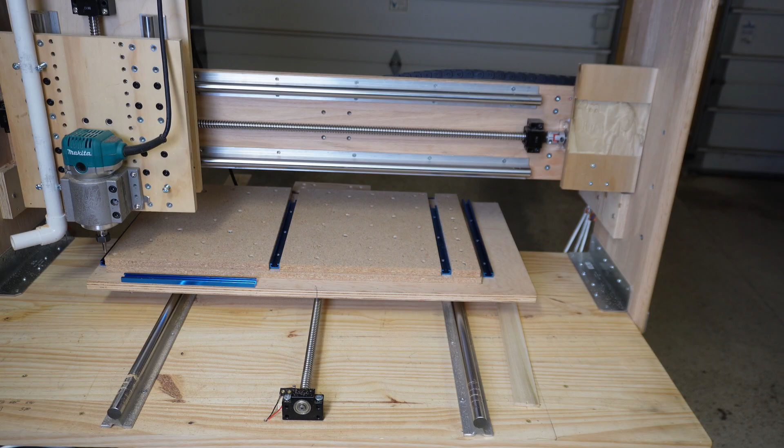I've zeroed my X, I've zeroed my Y, I've zeroed my Z. I'm going to flip on my router. I have my G code for my grid in. I'm going to hit start job.

I'm in VCarve Pro. You can do this on Desktop or Aspire or a host of other software. I'm going to choose to set up my job, and when I set up my job, I'm going to put in the dimensions of my grid that I want on my spoil board. In my case, I'm going to do 680 by 360. For the depth, you can put the depth of whatever your spoil board is.

Then we're going to go ahead and put our datum position. In my case, I'm going to put it on the bottom left-hand side. I definitely want to zero off the material surface, and I'm going to click OK.

Now that we've set up our job dimensions, go to the top right-hand side and turn on grid snapping. It looks like a little piece of graph paper. If it's not already clicked, click on it. When you do, you should see a series of dots appear across the screen.

If you hit F4 on your keyboard, it should bring up a menu. This is the snapping options, and in particular what we want to pay attention to is snap to grid. If it's not already there, click on it, and we're going to use this to set our spacing.

Let me illustrate by first putting in a spacing of 50 millimeters and hitting the enter button. When I do, it's shifted those dots so they're every 50 millimeters up and down all the way across our surface.

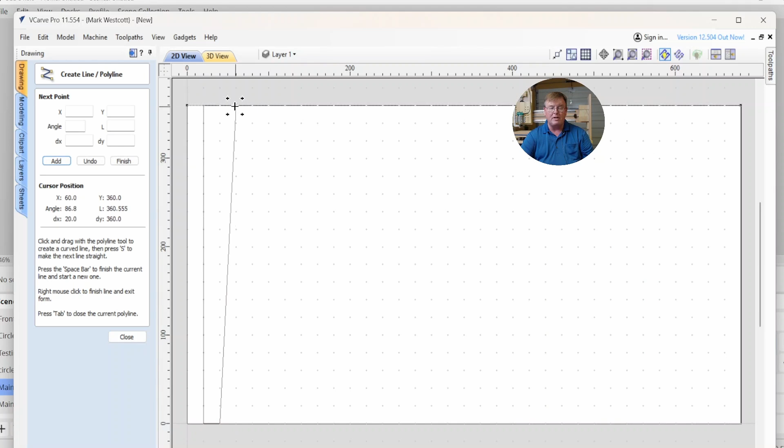Then it's just a matter of going to the left-hand side and clicking on the Polyline tool, and we're going to create a series of lines all the way across by left-clicking and working our way through points. If you hover over the points, you'll see the icon change, so you don't end up getting off.

If you do manage to mess it up, like I messed it up deliberately there, just go over to the left-hand side, click undo, and it'll back you up one point. You want to wind all the way through and do all your lines for your vertical. It doesn't take very long.

Now we're on the far right-hand corner, but our original was here. If we hit tab, it would put a line right across our board, which we definitely don't want. So what I'm going to do is hit the space bar, and that will terminate that polyline. We now have all our vertical lines evenly spaced across our grid.

I'm going to hit close, go back into the Polyline tool, and we're going to repeat that same process, only this time we're going to do horizontal.

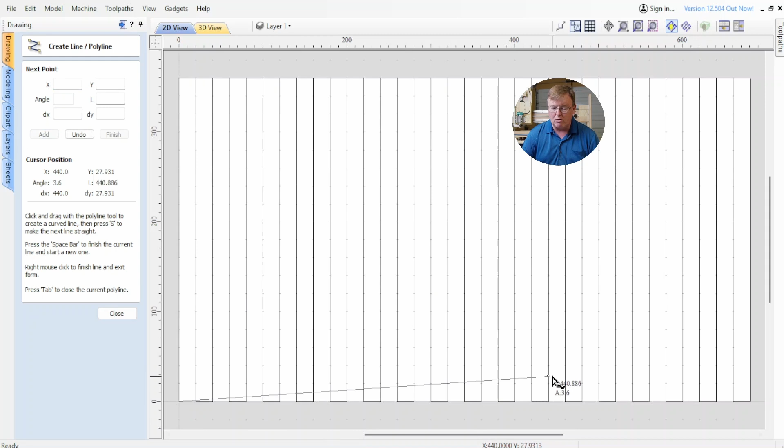So we're creating a new vector. I'm going to go far left, left click, and once again, even though you can't see those dots so well, they will light up. I'm going to wind my way through my spoil board again.

And obviously you could have put the spacing at whatever you wanted here. Oops, I've got to back up two spots - I didn't quite get that one.

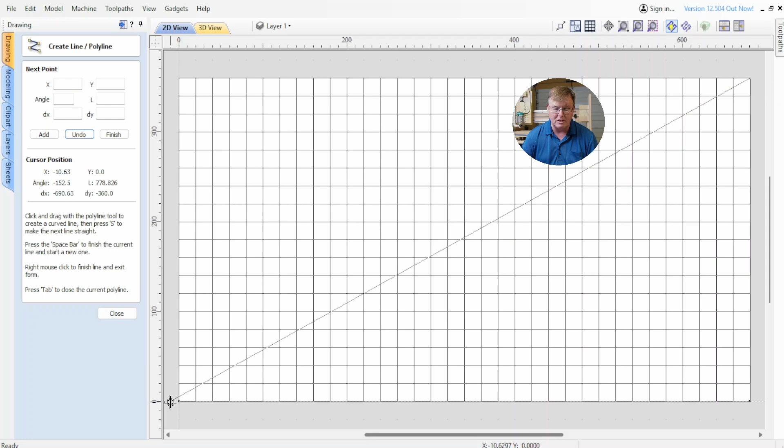I'm going to go ahead and make sure I get that top line too. Once again, I'm in that predicament where I don't really want to go back to my starting point and end the polyline, so I'll hit the space bar, and that will terminate the polyline in the middle.

We now have our grid. I'm going to close that out.

It's time to set up our tool paths. The tool path button is on the top right-hand side. I'm going to go ahead and click on the thumbtack here so that it doesn't slip off, and click on the vertical ones first, so I've selected all the vertical vectors.

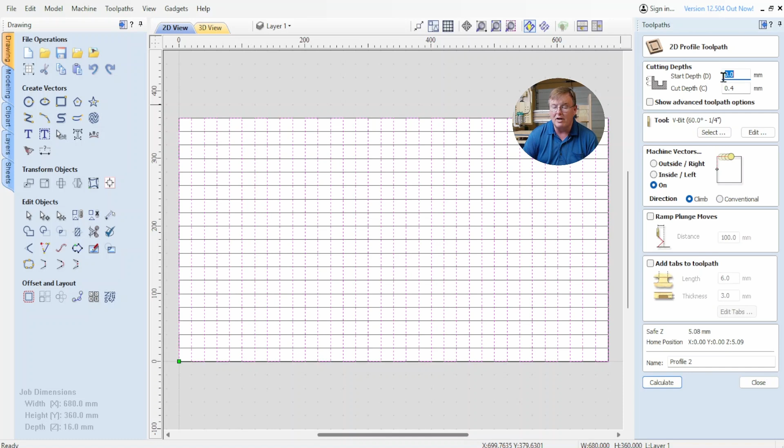I'm going to go to the profile toolpath and set one up. I'm going to start at a start depth of 0, and do a cut depth of just 0.4 millimeters. It's important that you've already surfaced your spoil board.

Then we're going to select our bit - I'm going to choose a V-bit, using a 60 degree one. If I want to change the speeds, you can ramp the speed up quite a bit because it's just barely scratching the surface, so feel free to adjust the speed with the edit button. That won't save it inside your tool database, but will allow you to run this very, very quickly.

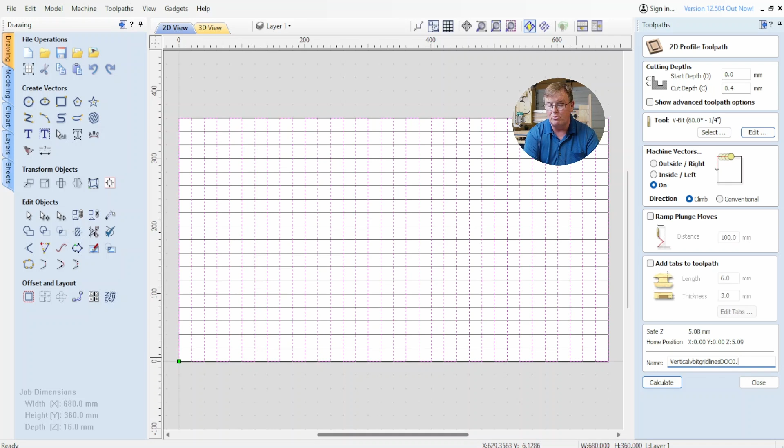Definitely want to do line on. I'm going to call this vertical V-bit grid lines, with a depth of cut of 0.4 millimeters. Calculate.

There's our vertical ones. I'm going to close that out. Let's go get our horizontal ones, going back to the 2D view. I'm going to select my other vector here, and turn this other one off so we don't confuse ourselves.

Everything should already be set up from our last one, so I have all my information. Same process, I'm just going to change the name of this to horizontal grid lines. Calculate.

So we have a separate one. Now I'm going to select both of those. I'm going to reset my preview, and I'm going to preview the visible toolpaths.

By doing it this way, it's going to run one vector all the way through, and then it will get the other one. That way you don't have your machine get confused and start doing little squares, which takes forever to machine. That's another reason why we didn't do it like an array copy of a single square. The machine time would be astronomically greater than it's going to be with this.

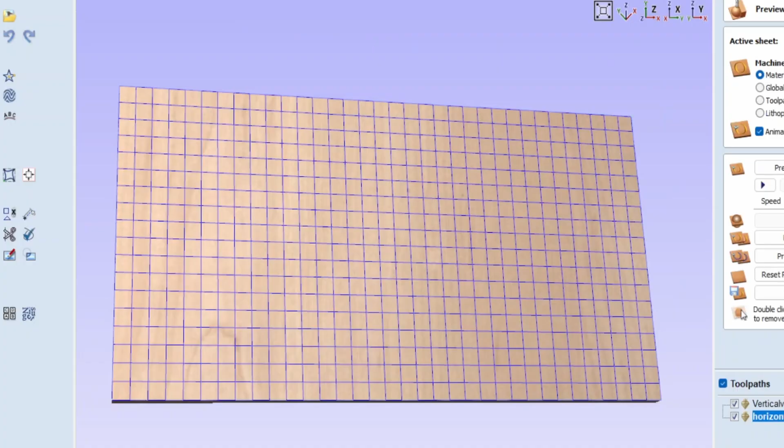This is extremely efficient. So with that being said, let's go ahead and preview the visible toolpaths. Let me rotate this ever so slightly so you can get a little better view of it. Maybe I'll speed it up. My camera's being recorded at the same time, so it's slowing this down quite a bit.

And now here comes my horizontal path. And there's our grid lines, and every one of those squares is going to be 20 millimeters by 20 millimeters.

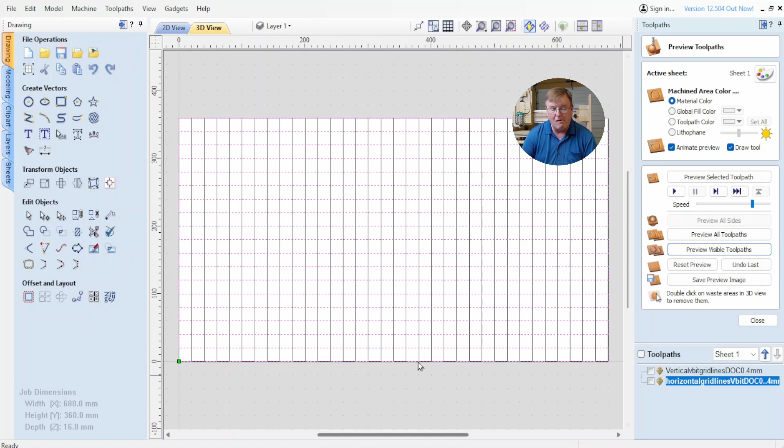Let's see how long that would have taken in order to do this. If I select both of these, go in, and it says it would take 21 minutes, but it's got a scale factor of 2 on the time. Because I'm not doing a bunch of up-down movements, it's probably going to be total time of maybe 10 minutes.

And then the only thing we have to do is, with those two selected, we're going to go into our Save Toolpaths. Since we're using the same V-bit, we can go ahead and save the visible toolpaths in one file, and that way our CNC machine will do the vertical ones, and it'll immediately follow up by doing the horizontal. That makes it so that the 0 point was the exact same spot for both of them.

There's no chance of that getting messed up. I'm going to save this, and we're going to go to our CNC, and we're going to actually mill this out, and we'll have our grid lines on.

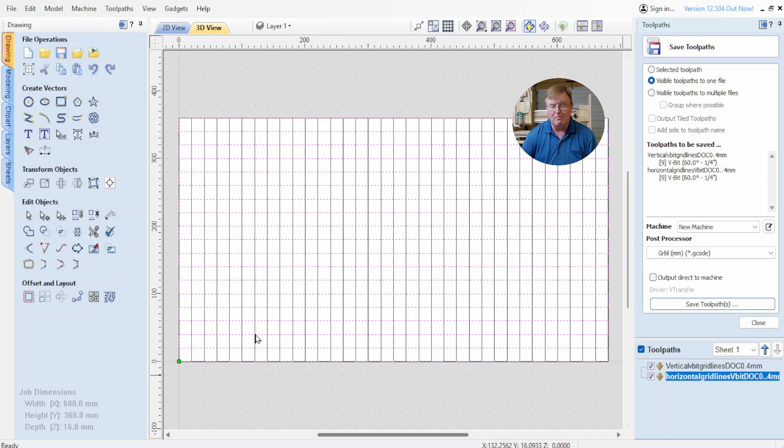Then all we need to do is put some sort of square on the outside. I'll probably put that as a separate video here shortly so that we can keep this reasonably short.

So I'm ready to run my grid, but when I do my 0,0 location for my grid lines, I want it slightly different than the 0,0 location that I would expect it to be on my spoil board.

Why would I do such a thing? I do such a thing because if I'm putting these new boards down and one of them gets twisted just a little bit when I'm screwing it down, that will give me margin as I go up this far side and margin as I go across this way to get a good reference line.

Otherwise it might go off into space and then I have nowhere to reference against the far edge of my board. So better to be in a little bit and up a little bit. Just make sure that you have sufficient room to run it.

I've already set my 0x and 0y for this location rather than that location right there. And now I'm going to go ahead and slip a playing card in here.

I've got it set for precise control. Slowly move this down. So I'm just getting tension right there. I'm going to stop and hit Z0. I'm going to raise up my bit. And so my X reads 0, my Y reads 0, my Z reads 0.

I've checked my spoil board to make sure that I don't have any screws or threaded inserts or T-rail that the bit is going to hit. I'm going to load up my G-code and hit run. I'm going to flip on my router. I'm going to hit start job.